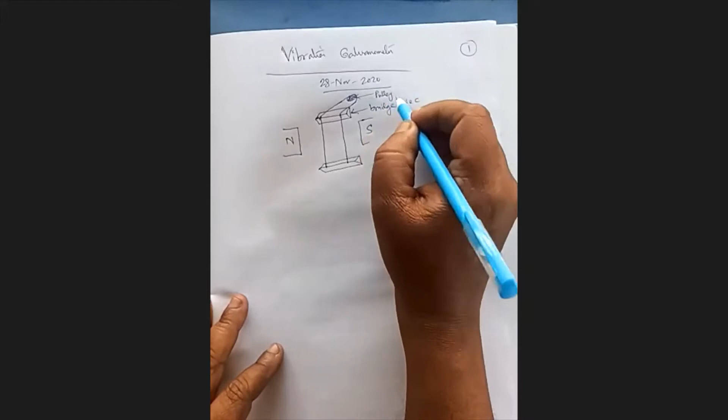okay, there is a pulley arrangement. Pulley, and the whole arrangement is tensed, is stretched actually. So this is the spring. Actually, this figure is given in the material already. That one.

Now, so the conducting wires are under tension. Okay, the conducting wires are under tension, and it is carrying the current also at the same time in the magnetic field.

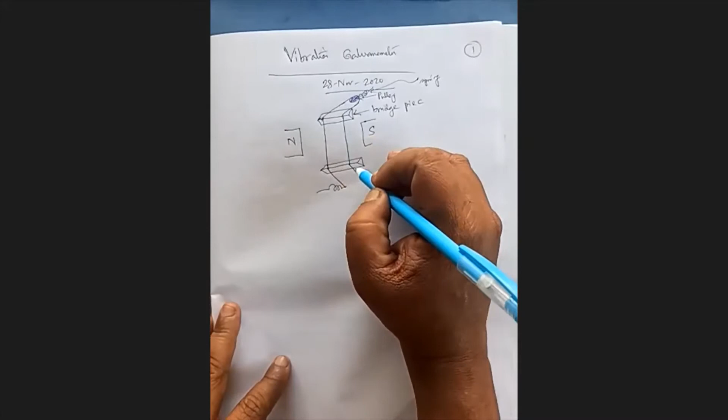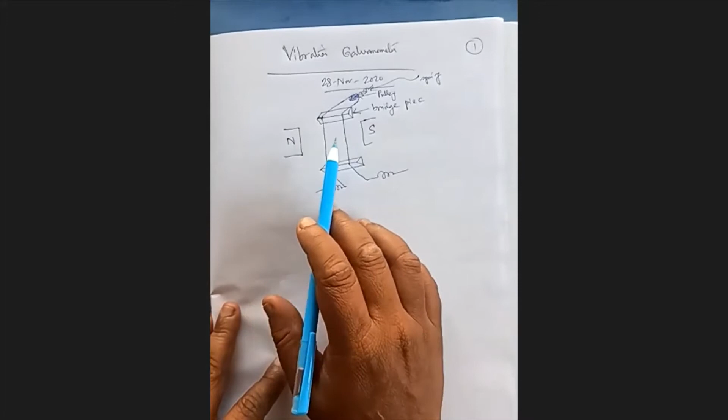So now the thing is that whenever a current is passing through the coil under stretched condition, okay, then the coil will start vibrating. A force will come into act, and the coil will oscillate. It will vibrate just this way. It cannot move too much because it is under stretched condition on the other side.

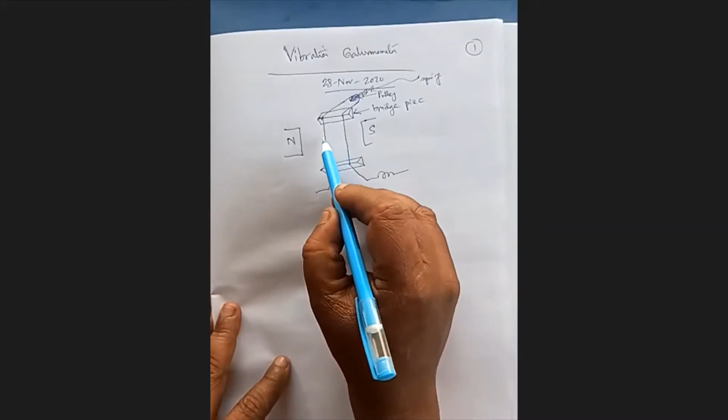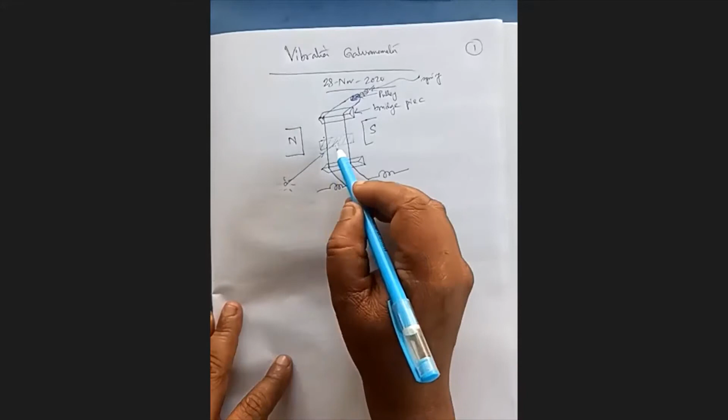Okay. Now one mirror is placed which is attached to the conducting wire, and there is a light source. So there is a light source which emits light, and the light is incident over the reflecting plane or the mirror, and it comes back. So it's a light source.

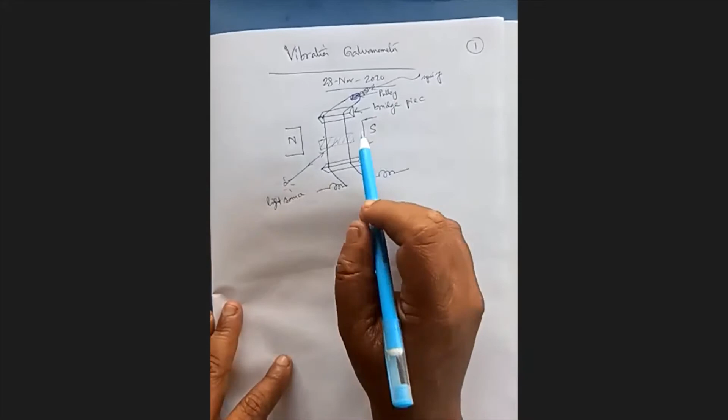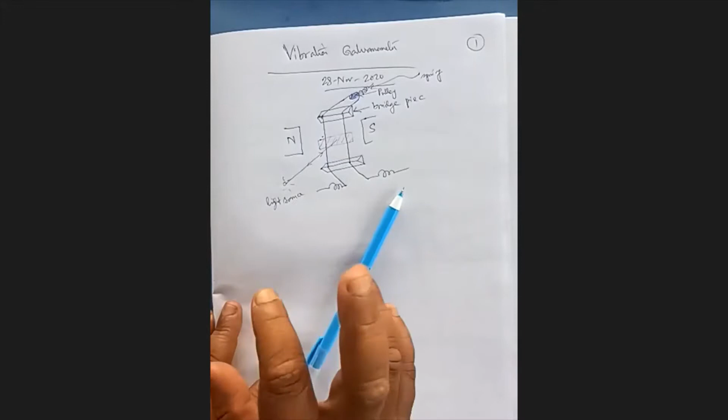Now when some current flows, it oscillates. The frequency of oscillation depends actually on the frequency of the applied current, the omega, the angular frequency of the applied current. And due to the pulsation of this coil as well as due to the pulsation of the reflecting plate attached, okay, the reflected beam will also oscillate.

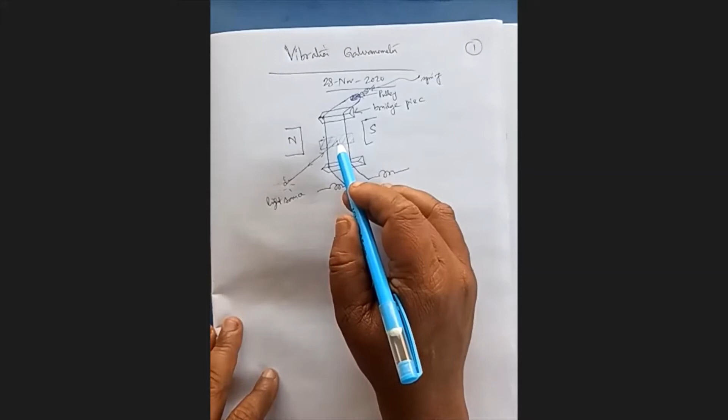And we know that when the coil or the reflecting plane moves by an angle theta, the reflected beam will move by 2 theta. Okay. So from the oscillation of the reflected beam, from the time period of oscillation, we can find out the frequency of oscillation, the frequency of the applied current actually.

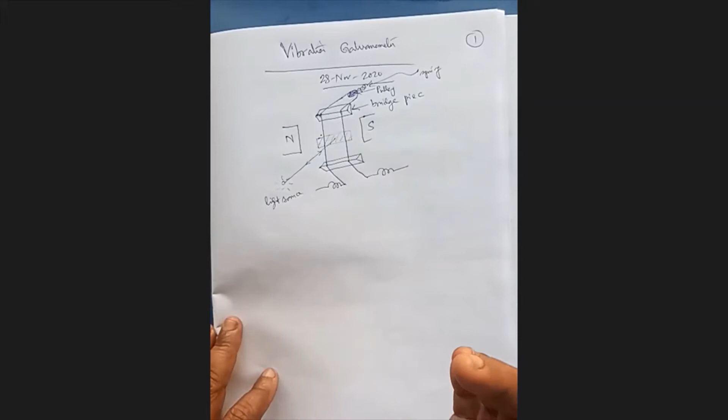Okay. Now, when the frequency of the applied current is equal to the natural frequency of oscillation, the system starts resonating, a resonance will set in, a mechanical resonance, and the amplitude of oscillation will be quite high. Okay, it's a mechanical resonance.

Okay, so when the applied current's frequency is equal to the mechanical natural frequency of oscillation of the system, it will start oscillating heavily, and from the high amplitude of oscillation, we can say that yes, resonance comes in, and our applied frequency is equal to the natural frequency of the system, and our natural frequency of the system is already set to a fixed value. So we can say that yes, our input frequency is equal to that value.

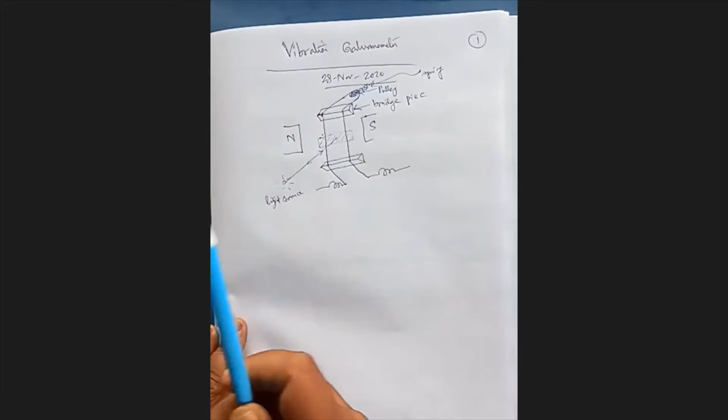Sometimes what happens, we don't know the input frequency. Our sine omega t, omega is not known. In that case, you will vary the natural frequency of oscillation of the system. How will we vary the natural frequency of oscillation? Just by varying the tension of the coil. Okay.

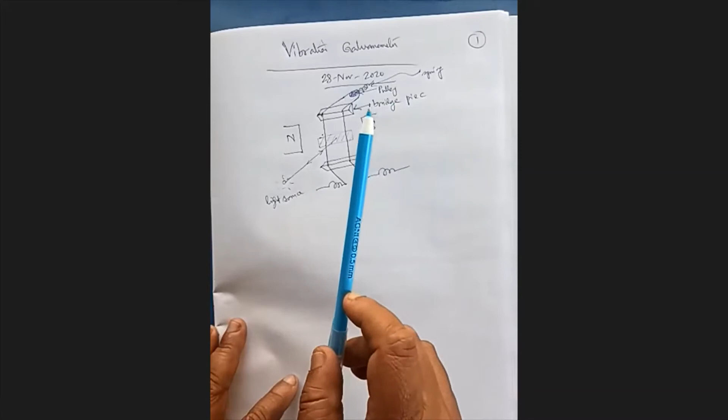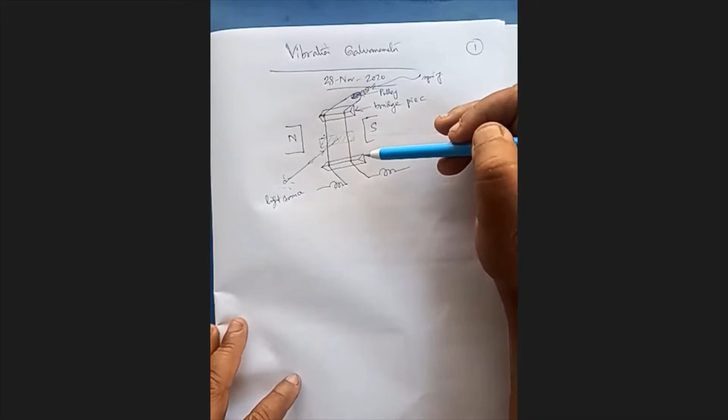The tuning is done in two ways. One is a coarse tuning, by varying the gap between the two bridge pieces, the length of the coil. And a fine tuning is done by varying the tension of the spring. So that's how we can vary the frequency of oscillation.

And when an unknown frequency is applied there, okay, and we tune the thing at a particular tuned value of natural mechanical angular frequency, we will note the resonance condition, and that resonant frequency indicates actually the unknown frequency of the input signal, input current. So that's how we can find out the frequency of the applied current.

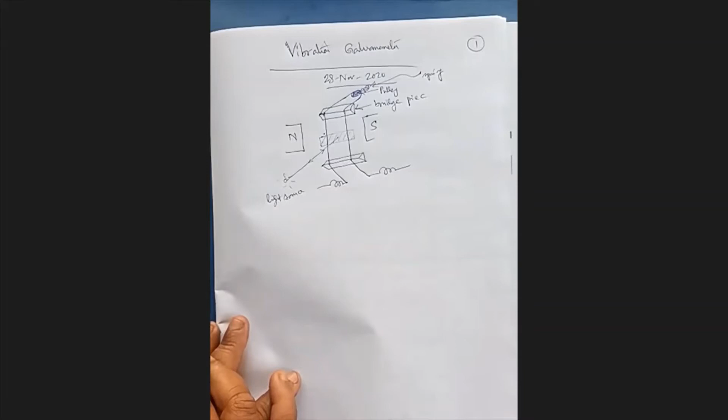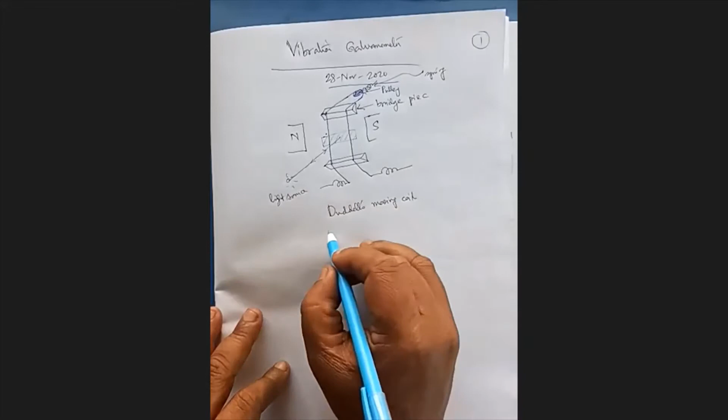Now this arrangement is called actually Duddell's moving coil vibration galvanometer. Duddell's moving coil vibration galvanometer.

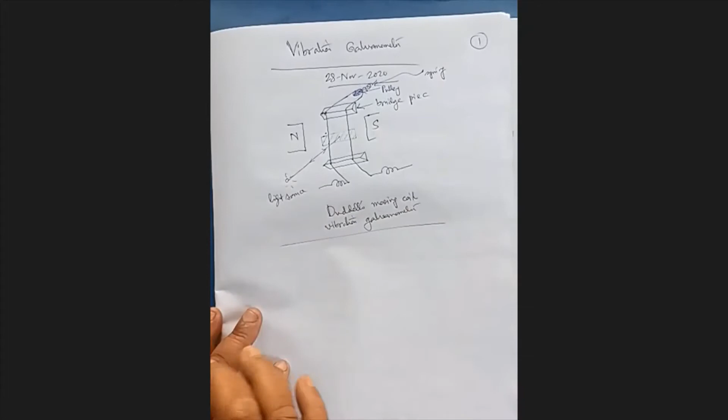Okay. Obviously, in this instrument, we reduce the damping to a low value so that under resonant condition, a high amplitude of oscillation will be noted. The response will be quite peaky in nature under mechanical resonance.

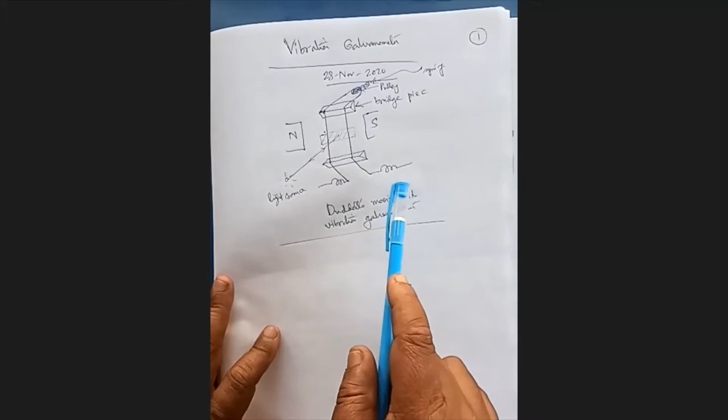And also another thing, we keep the inertia of the moving system quite small, so that the moving system can follow the rapid change in oscillation. Clear? So, and then ultimately the mechanical resonance is established.

Now, what is the material of the moving coil? It consists of a fine bronze or platinum wire. This material has appropriate electrical conductivity to carry current of required amplitude, and also has adequate mechanical strength to withstand the oscillation. Okay, so that is the basic principle of vibration galvanometer. Obviously that is one form of vibration galvanometer, a Duddell's moving coil galvanometer.

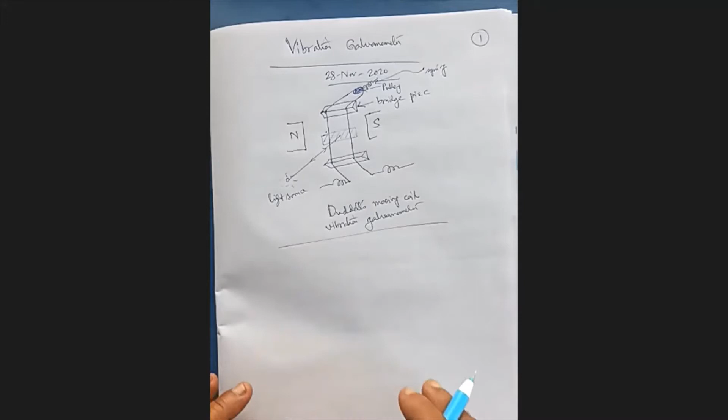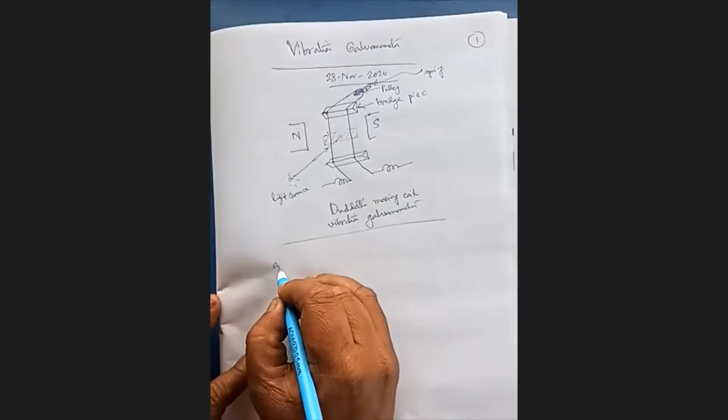Okay, now what is the equation actually? Its equation is, you know, A d²θ/dt² plus B dθ/dt plus Cθ equals G I, where I is the current, Im sin ωt. So it is the excitation current, or input current, and omega is the frequency that we want to measure.

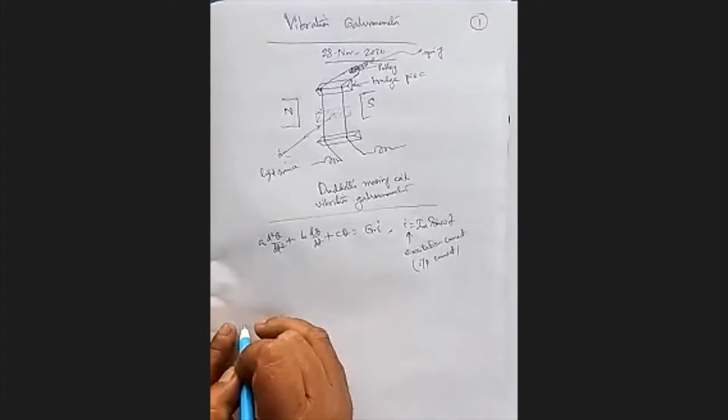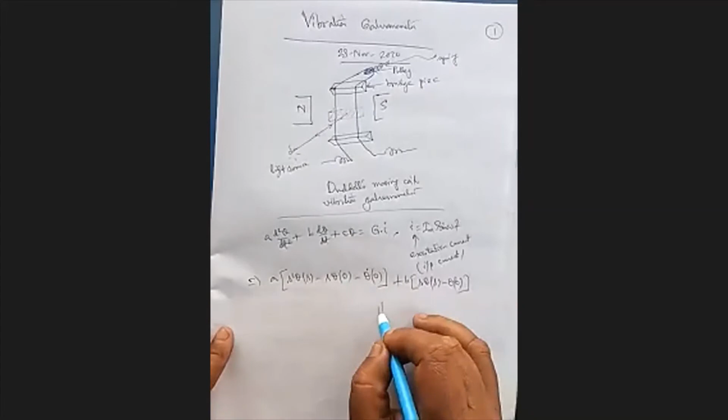Now we take Laplace transform as usual. So it is A into s squared theta(s) minus s theta(0) minus theta dot(0), plus B into s theta(s) minus theta(0), plus C theta(s) equal to G into I(s).

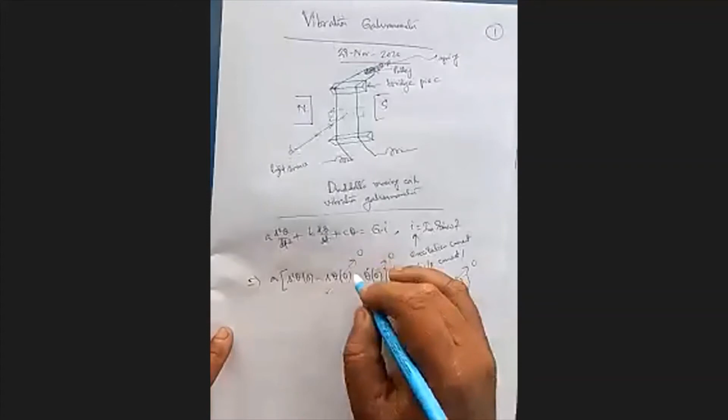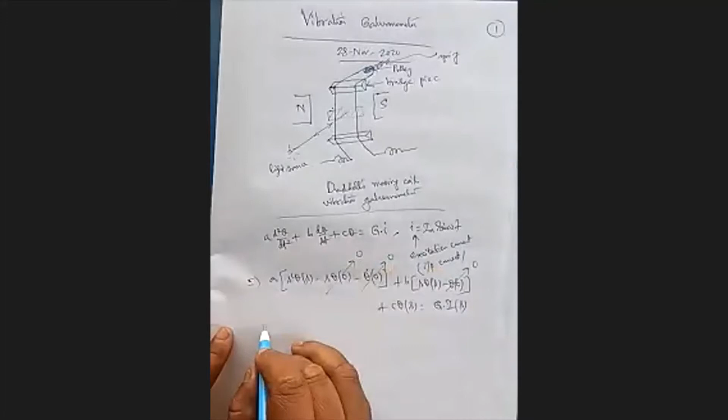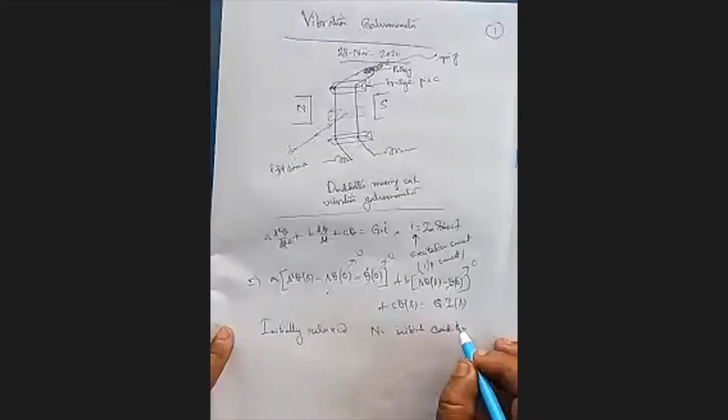Obviously, the system is initially relaxed. After we apply current, only then we get some deflection. So all the initial conditions are zero. This type of system is called initially relaxed, means no initial condition. It does not store any energy in the beginning. Okay.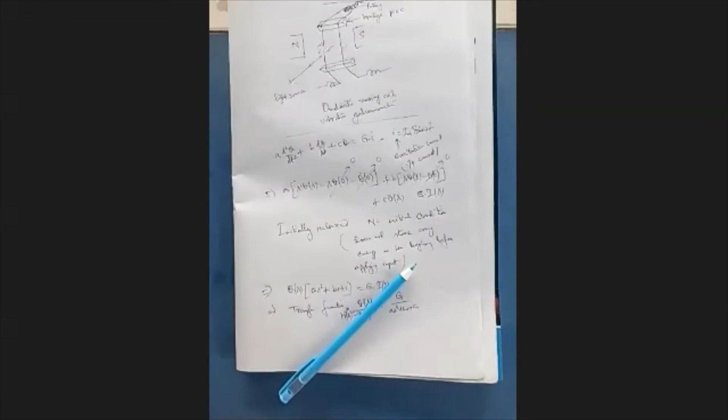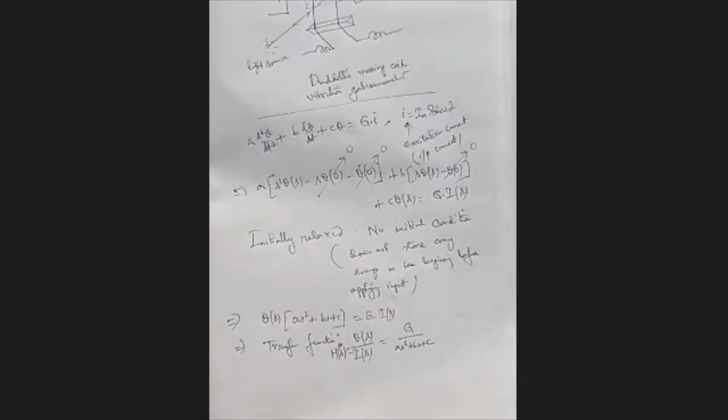Okay, so that is the transfer function. Now what I intend to say is that when we apply a current, any input, whatever it may be, current or voltage, and wait for some time, then the output attains a steady state condition.

Then the amplitude of the steady state output can be found by a technique: if you put s equal to j omega in the transfer function, then you can find out the gain of the system, or the multiplying factor of the system, and the phase of the system that will be contributed to the output, that will be used to modify the output.

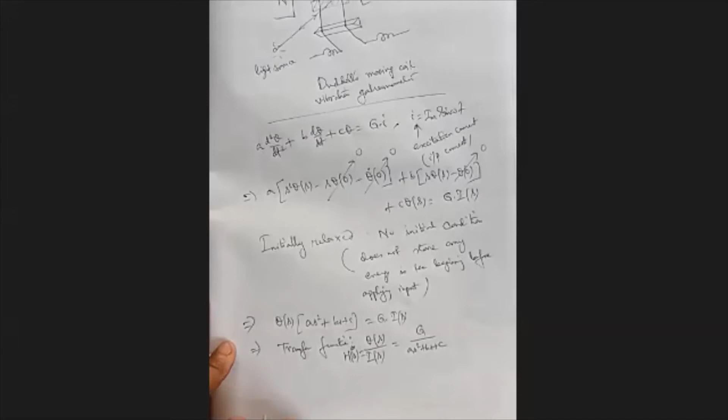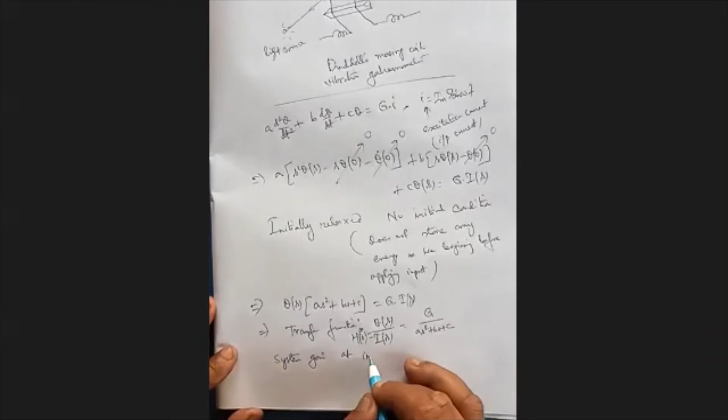So what is the system gain at input frequency omega? It's found by H(s) with s equal to j omega. This is equal to G by, now you put s equal to j omega here, minus A omega square plus B into j omega plus C. Okay. So that is the system gain.

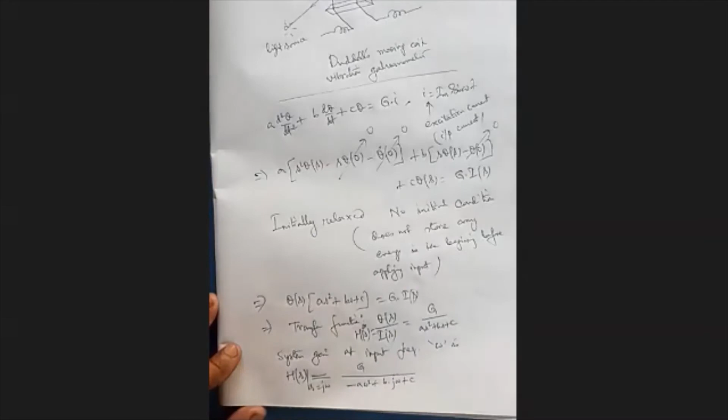Now I write it in the next page. What I am writing here, these are all given in your material. Nothing new today. So I am writing H(jω) equal to G by, now we simplify it, C minus A omega square plus jB omega. That is H(jω). Okay, next page number 2.

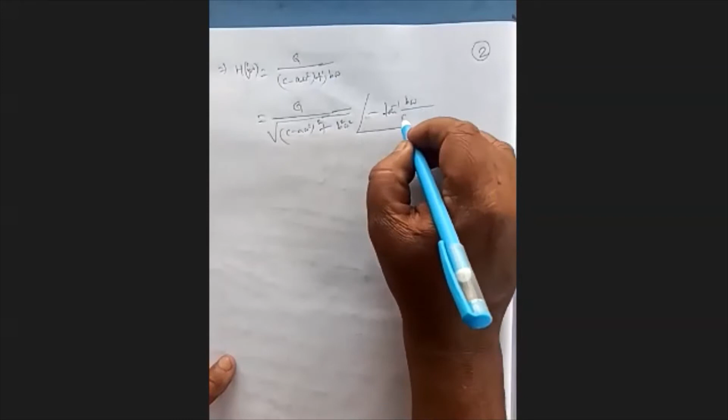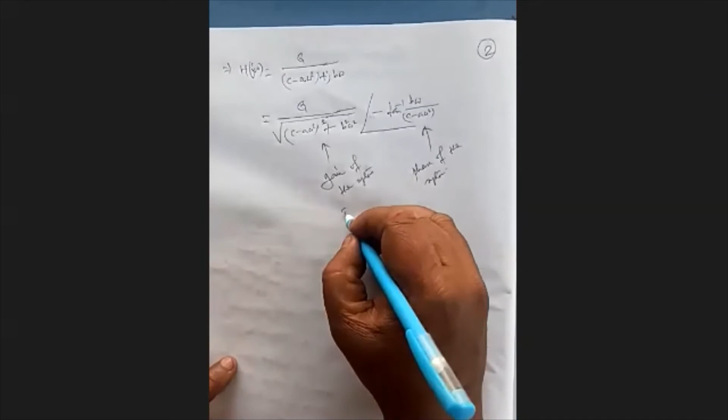Now, what is the amplitude of the transfer function? The amplitude of the transfer function is G divided by square root of (C minus A omega square) squared plus B square omega square. And angle is minus tan inverse B omega by C minus A omega square. So this is the gain of the system, and that is the phase of the system. This we call mod of H omega, and the phase we call angle H omega.

So it means that whenever there is a system H(s), we apply some input, say I(t), some input current as a function of t, and we get some output theta(t), some deflection varying with time. So if we apply some input current Im sine omega t, omega is the input frequency, then what is the steady state output? Theta SST is the steady state output, the output available long after the input is applied.

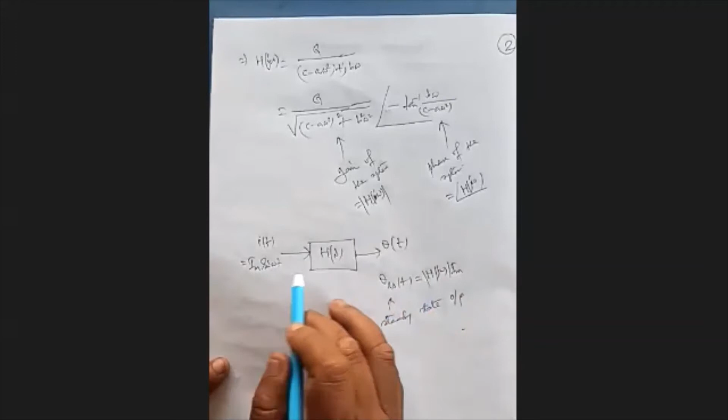Steady state output can be found as mod of H omega, that is the gain of the system, into the magnitude. The two magnitudes are multiplied. And what is the phase? Input is sine, so output will also be sine: sine omega t plus the phase of the system, angle H omega. So here we are getting it. It's mod of H omega.

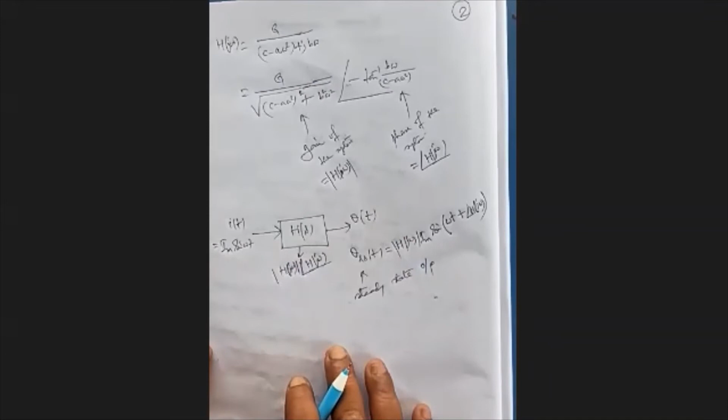Mod of H omega, and the phase angle is angle H omega. This one. Clear? So that is this particular thing. So what is our steady state output, theta ss of t? Our input is Im.

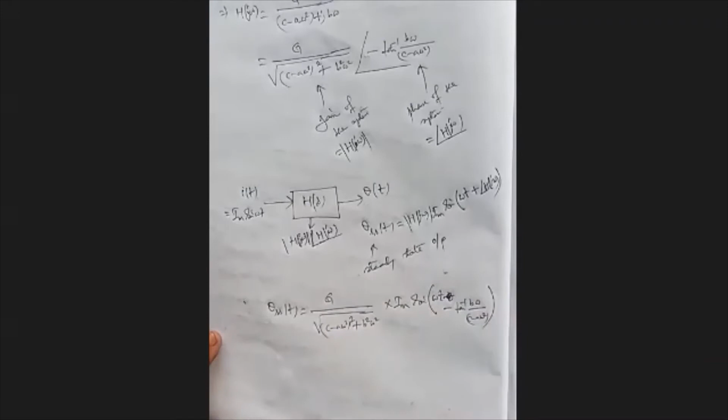So our output will be the magnitude of the system G divided by square root of C minus A omega squared plus B square omega square, into the input current, that is into Im. And sine omega t, it's not plus, there is a minus sign, minus tan inverse B omega by C minus A omega square. So that is the steady state output.

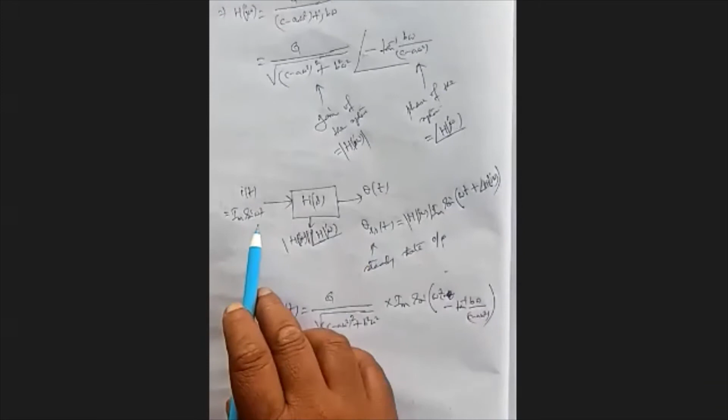So the input amplitude Im is multiplied with the gain of the system, mod of H omega. And what is the phase of the system? The phase of the system is actually added with the input phase. Our input phase is omega t. If our input is sine omega t plus alpha, then it will be omega t plus alpha, plus the phase contribution of that particular system.

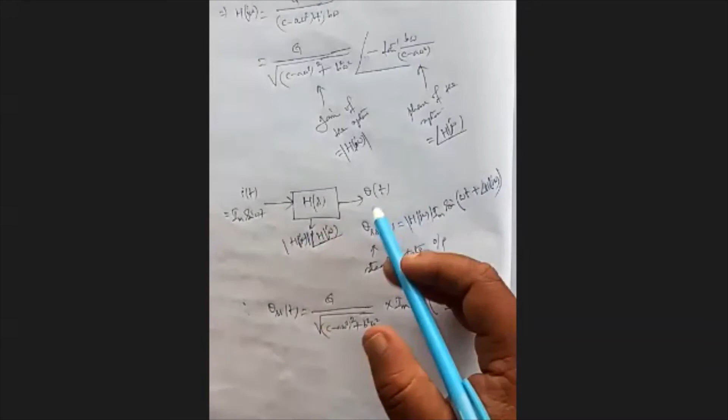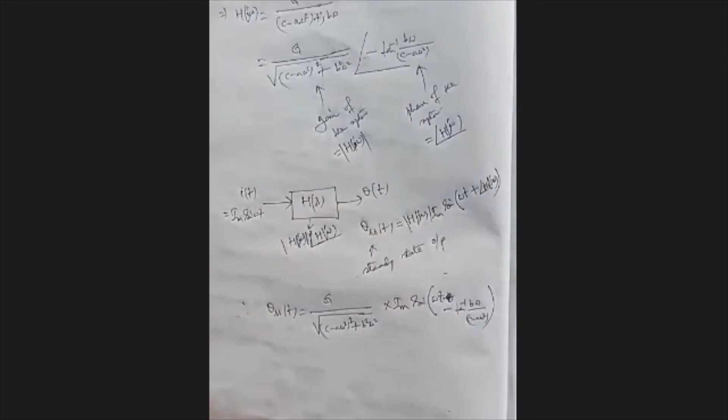Now here our phase is negative, that's why a minus sign is there. If phase is positive, it would be positive, no problem. So this particular fact will be discussed in other semester classes. When we go to the higher semester class, it will be proved in the class.

So therefore, what is the amplitude of output? The amplitude of response is G Im by square root of C minus A omega squared plus B square omega square. And phase of the output, equal to sine omega t plus this. So phase is simply minus tan inverse B omega by C minus A omega square.

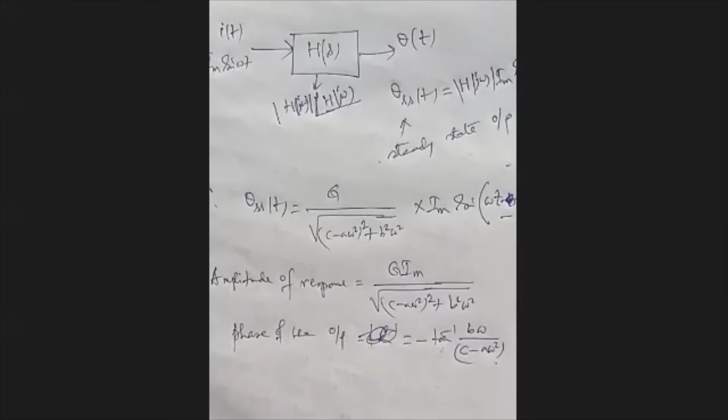Now note, what is our purpose? Our purpose is that when we apply some input current and the input current somehow triggers the resonance of the system, then the amplitude of vibration will be very high. From the high amplitude of vibration, we can easily conclude that the mechanical resonance is set, and corresponding to that mechanical resonant frequency, we can find out the frequency of the input. So we need a high amplitude of vibration.

Therefore, to increase the amplitude of vibration, what we can do? G can be increased. But what is G? G equal to NBA, where N is the number of turns of the coil, A is the cross-sectional area of the coil, or the former area. You can increase N or A. Flux density cannot be increased very much.

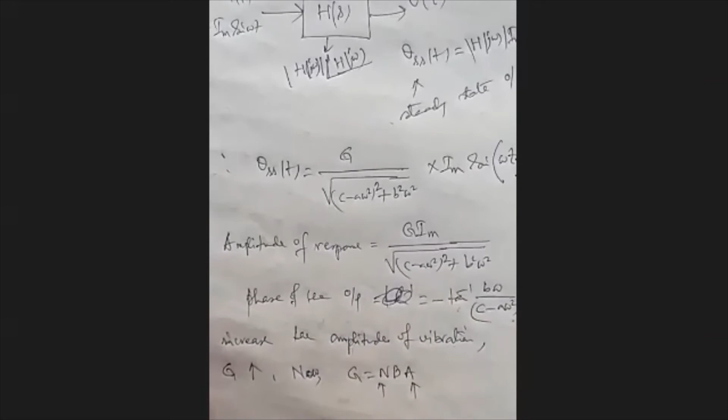So if we increase N and A, the inertia constant A will be increased also, because more number of turns means more mass, and more area means either the mass is increased or at least the mean radius of rotation will be increased. In other words, the moment of inertia, the inertia constant A, will increase ultimately.

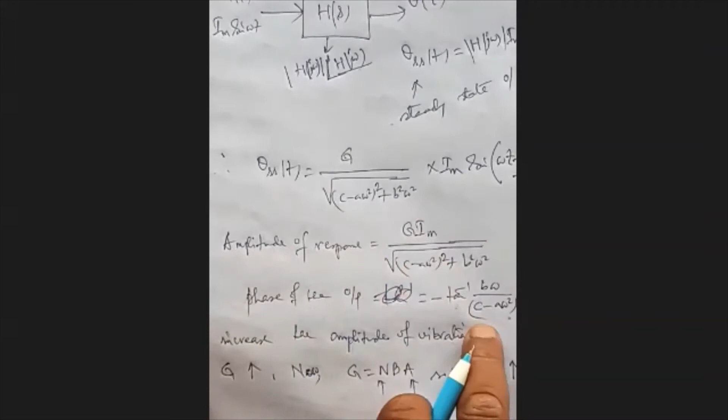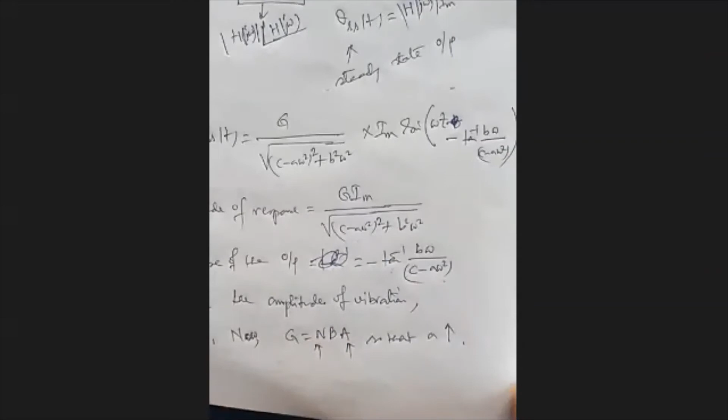But a high A means the denominator is more, because in the denominator, C minus A omega square, A is there, so the squared function will be more. And therefore the amplitude of response will be less. So this method has some limitation. Therefore, another method is also there.

Method 2: if we make C minus A omega square equal to 0, or omega equal to root over C by A, then a part of the denominator will vanish, so the amplitude of response will be quite high. That is a very good, effective method.

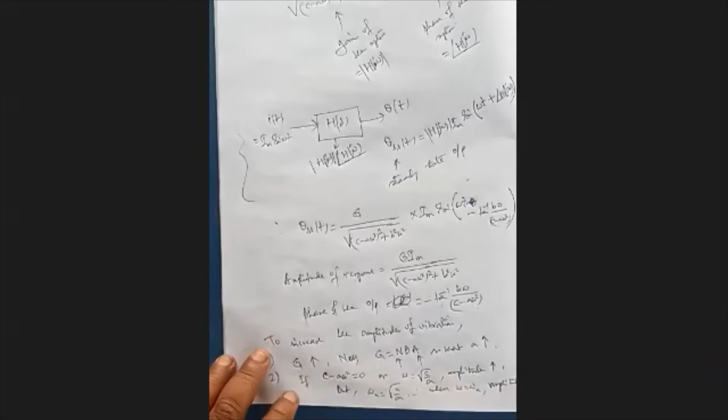Omega is the input frequency, but we know our omega n equal to root over C by A. So therefore, when omega equals omega n, the natural frequency of oscillation, our amplitude will increase. So this is the resonance condition.

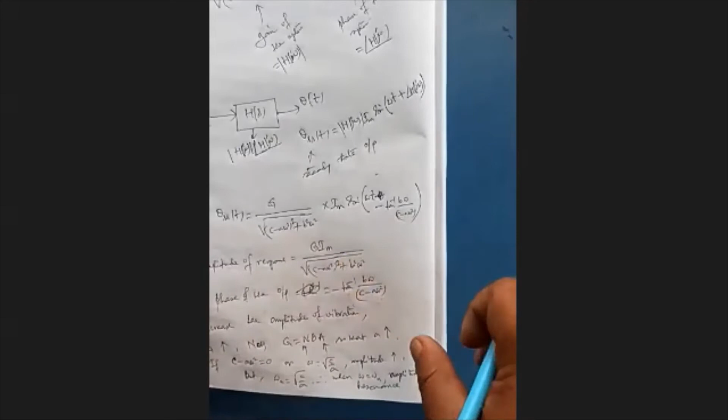Okay, so under resonance, when the input frequency is equal to the mechanical resonance, natural frequency of oscillation, then the amplitude of response will be quite higher. So that is the resonance condition. From that we can estimate.

Now our mechanical frequency is known. It is actually found by tuning the coil, by setting a particular distance between bridge pieces or the length of the conducting wire, and also by varying the tension of the spring. So we can tune the mechanical natural frequency of oscillation. So omega n is known. So when omega equals omega n, we can find out the unknown value of input frequency. So that's how we can measure the input frequency.

And one more thing we know is that the amplitude of oscillation increases with another factor. It depends on the damping of the system also. When the damping has a particular value, we get a quite large amplitude of oscillation. So that's how we can increase the amplitude of oscillation.

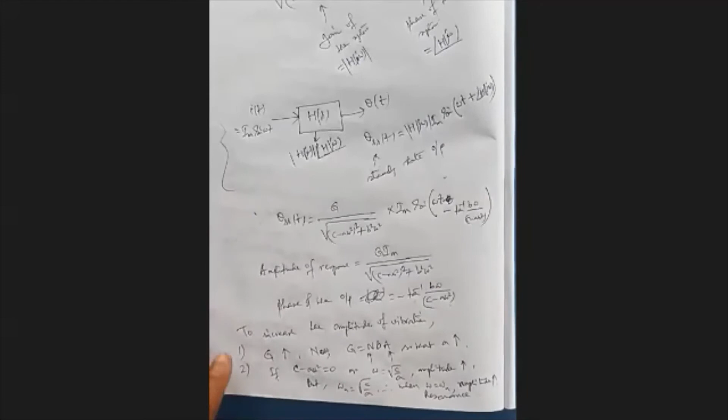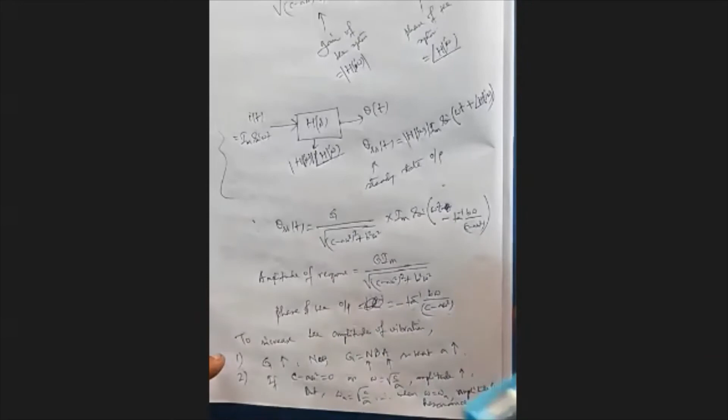So Duddell's moving coil galvanometer is one type of vibration galvanometer. But obviously there are other types of vibration galvanometer. I want to mention a second type. It will be discussed in the next page, page number 3.

Now note that, truly speaking, it is not a vibration galvanometer, it's a frequency meter, not exactly like a PMMC instrument. In this context I am calling it a frequency meter. Another version is vibrating reed type. I don't want to draw any figure just to save time; I am showing you the figure given in your material. So what is happening?

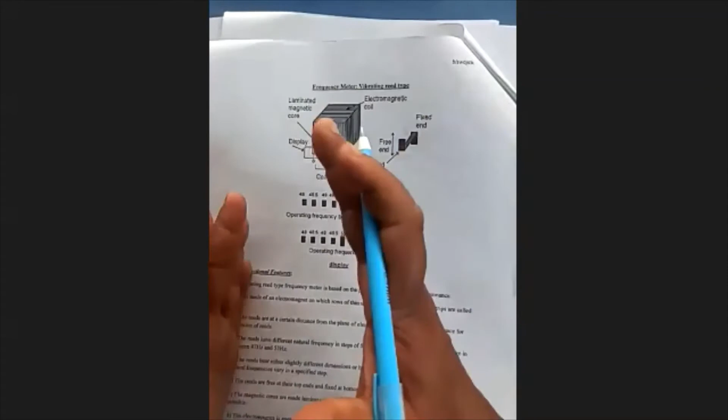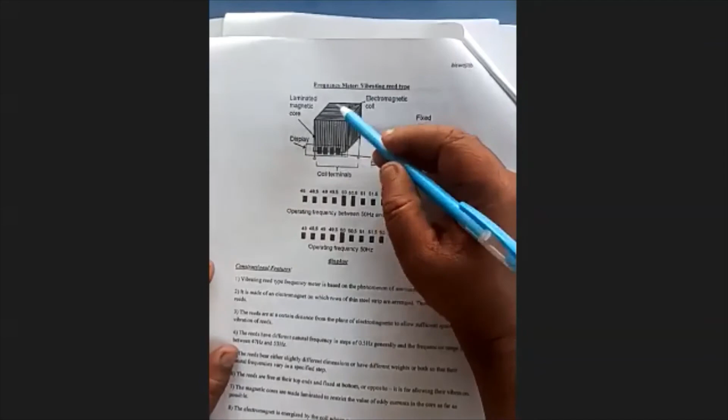There are sheets of steel or ferromagnetic material arranged, one slice, then another slice, then another slice. So it's laminated sheets, a laminated core. These are joined together and wound with a winding. This is the coil, carrying some current. The current may be either pure AC or a combination of AC and DC.

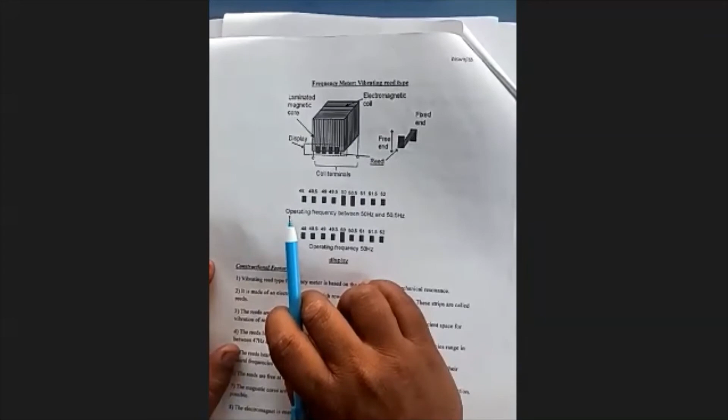When a current is flowing through that coil, some magnetic flux will be generated. It will pass through the ferromagnetic core. Now, as the coil is carrying some AC current, either pure AC or AC mixed with DC, the magnetic flux will start oscillating through the core. That oscillation will generate a force.

Actually, there is a particular array of rectangular steel pieces. We call it a reed. The reed has a fixed end and a moving end.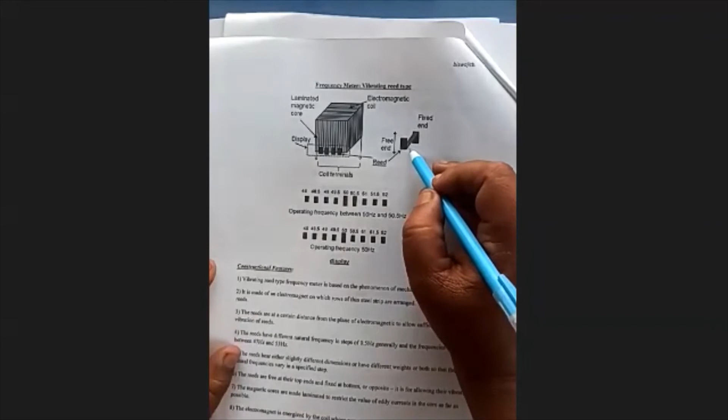Actually, for that particular reed, one end is fixed either here or

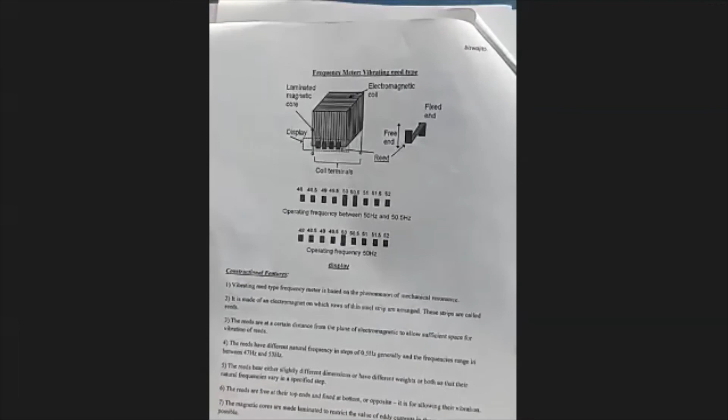Okay, so there is an array of reeds that are attached at the lower end. They are free to move. Now when some pulsating flux

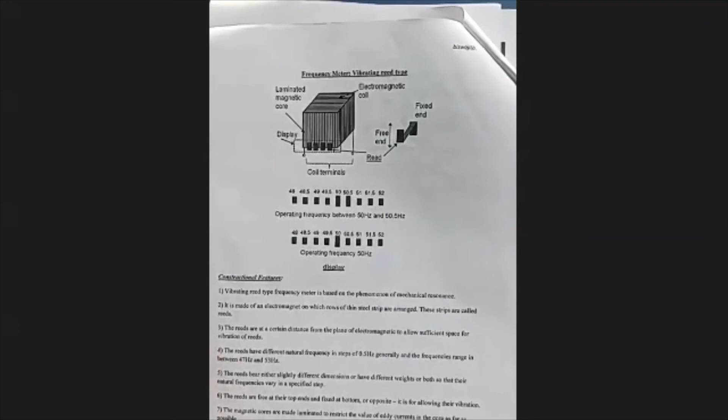the frequency of pulsation becomes equal to the mechanical natural frequency of oscillation for a particular reed, then the reed will start vibrating heavily. There are a number of reeds attached side by side, and each reed is dimensionally a little bit different and their weight is also different. Why are we changing the weight of each reed? Because we want to set the natural frequency of each reed to a different value.

For example, if one reed's natural frequency is 50 Hz, for the adjacent reed it is 50.5 Hz. For the next reed it is 51 Hz. On the other side it is 49.5 Hz, 49 Hz, 48.5 Hz. So they vary normally in 0.5 Hz steps.

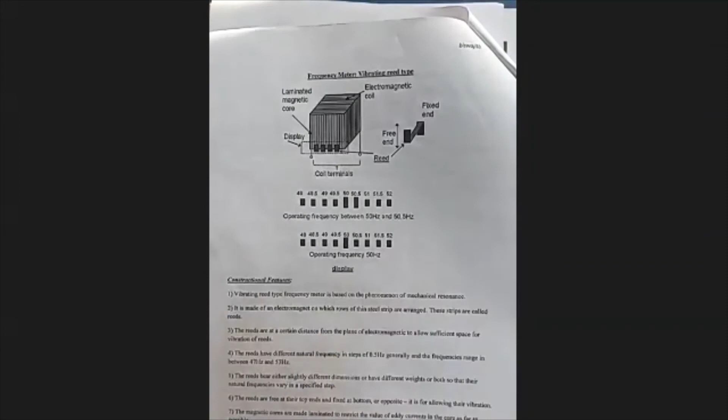Now when the operating frequency of the coil current is equal to the natural frequency of oscillation for a particular reed, that reed will start oscillating vigorously and move up and down. It will create some elongated stretch, and from that rapid pulsation we can conclude that that is the frequency of the input current. So that is the basic principle of the vibrating reed type instrument.

Now the equation is also given. When we apply some current I equal to Im sin omega t in the coil, the generated flux is also proportional to that current. Why? Because we are using a magnetic core in a linear magnetization curve.

We use a ferromagnetic material for the core, where its magnetization curve is linear, meaning its BH curve is linear.

You know the magnetization curve? Okay. So when we apply some current, now H is proportional to the applied current, the coil current, and B is proportional to the flux. B is the flux density and flux is simply the flux crossing through the entire area of the core. Now when we apply I equal to Im sin omega t, it is oscillating.

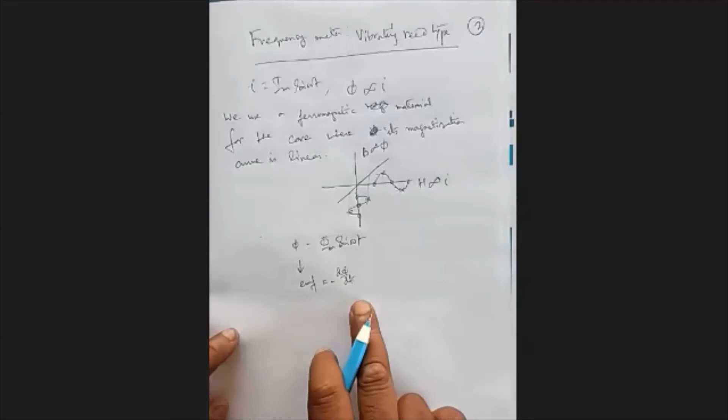So therefore we can say phi equals capital phi m into sin omega t. A pulsating current will generate a pulsating flux due to the linearity of the BH curve. And that pulsating flux will generate some EMF, which is equal to minus d phi dt, that is the rate of change of flux. And that EMF will drive

an eddy current. The eddy current is flowing through the core. Core is a ferromagnetic material which is also a conducting material, so it can carry that eddy current. So finally Ie equals Ime sin(omega t minus alpha).

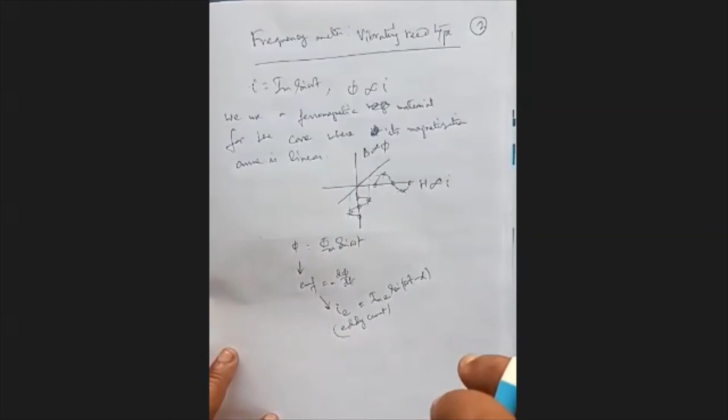Now note that a part of the flux is creating the eddy current, but not the entire flux will create the eddy current. There is some flux that is not completely linked with the core, so that flux cannot produce any eddy current. The flux which is not responsible for eddy current will interact with that eddy current, and a force will be generated.

So a force F will be proportional to the fraction of the flux which is not responsible for producing eddy current. I will write: fraction of the flux not responsible for producing eddy current. So K is that particular fraction. That flux will be linked with the eddy current produced by the other part of the flux, and ultimately some force will be generated.

So that is equal to K into phi m sin omega t into Ime sin(omega t minus alpha), or we can write it as K phi m Ime by 2 into cos alpha minus cos(2 omega t minus alpha), by trigonometric manipulation. Sin A sin B means cos(A minus B) minus cos(A plus B), as you know already.

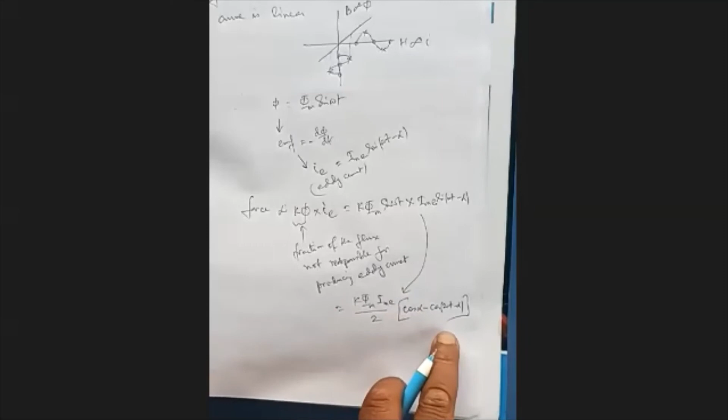So the force generated has two components. One is a fixed component, cos alpha, since alpha is fixed, and another component varies with double the frequency of the supply voltage, 2 omega. So the force has a component of frequency which is twice the supply frequency.

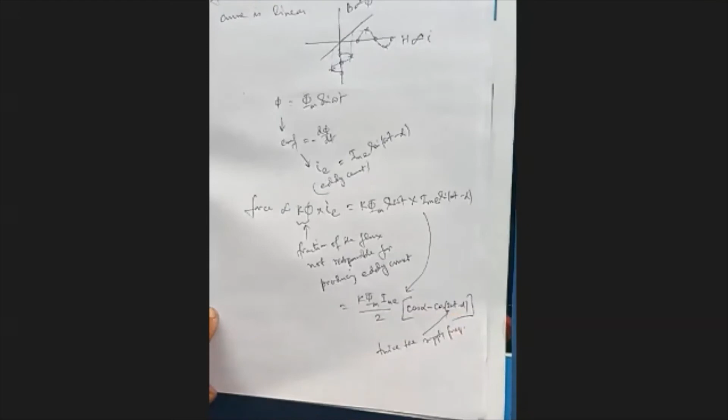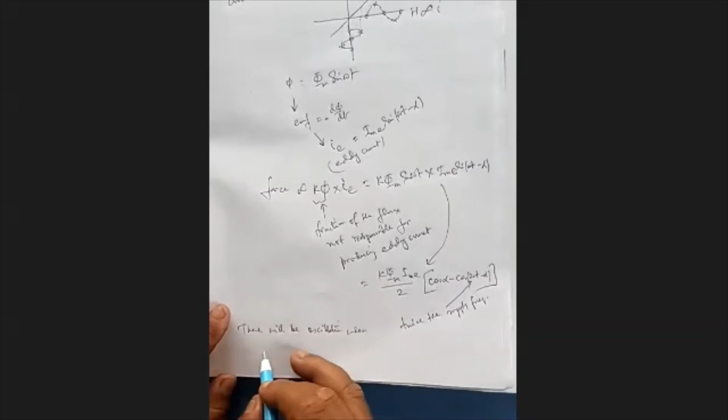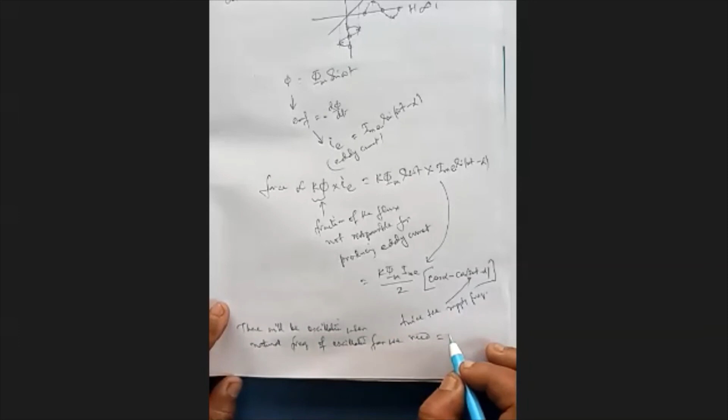Now the reed will start oscillating when the natural frequency of vibration of the reed is equal to 2 omega. There will be oscillation when the natural frequency of oscillation of the reed is equal to this frequency, that is the frequency of the driving force.

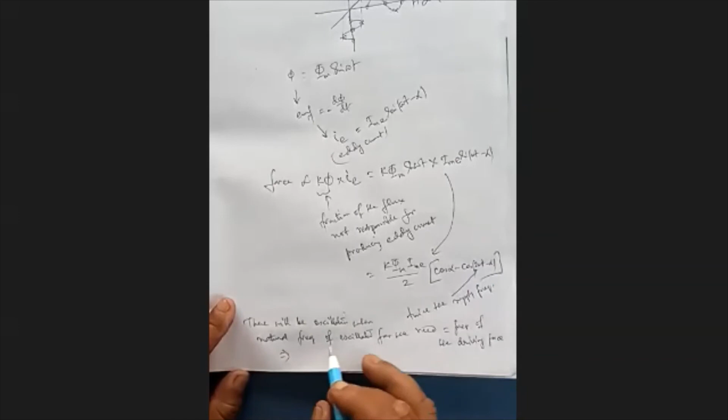It means the natural frequency of oscillation of the reed is omega n, and the frequency of the driving force is 2 omega; then there will be oscillation. So from that we can find omega equal to omega n by 2, and we can measure the input frequency of the system.

Now if our input is mixed with a DC component also, the DC component cannot produce the eddy current, because eddy current is produced due to d phi dt. So the DC current is not responsible for creating eddy current. So one current is AC, another current is DC.

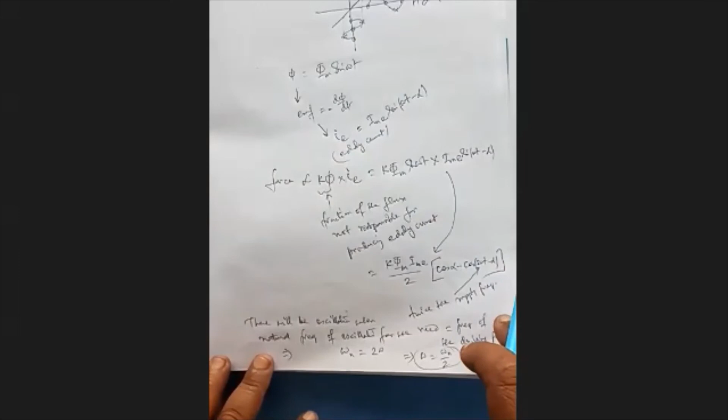The AC component, a part of the AC current, will be responsible for producing eddy current, but the force will be created by the combination of AC and DC both, flux into the eddy current only. Ultimately the derivation is given in your material. I am not doing it, just same principle, only thing is that the DC current cannot produce the eddy current.

Then ultimately you will see that from the frequency of oscillation, we can find out the frequency of input current also. So if you just see the material, you will get the derivation there. I am not doing it, just conceptually I am telling this. So that is the basic principle of vibrating reed type frequency meter.

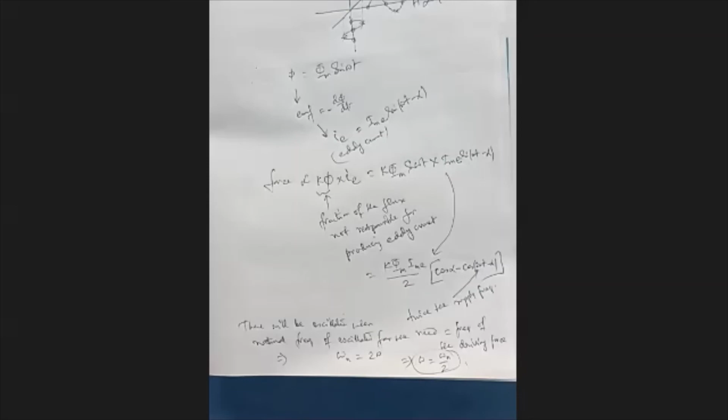Now next day we'll start something different. Okay, but one more thing is not yet there. I didn't discuss it. Better I say this thing now without wasting time. So it's the completion of discussion. Now I go to the next thing. So it's page number 3. So next will be page number 4.

PMMC meter excited by AC currents, or you can write voltages also. We know normally we apply DC current in the coil of the PMMC instrument, a PMMC ammeter or PMMC voltmeter, or in a vibration galvanometer we apply AC current.

In ballistic galvanometer, we apply short duration charge, charge flowing through short duration. So I'm not talking about ballistic galvanometer or vibration galvanometer. I'm talking about PMMC meter, ammeter, voltmeter, and the D'Arsonval type of galvanometer. Their coil currents are normally always DC. Now what happens if we apply AC in those PMMC meters?